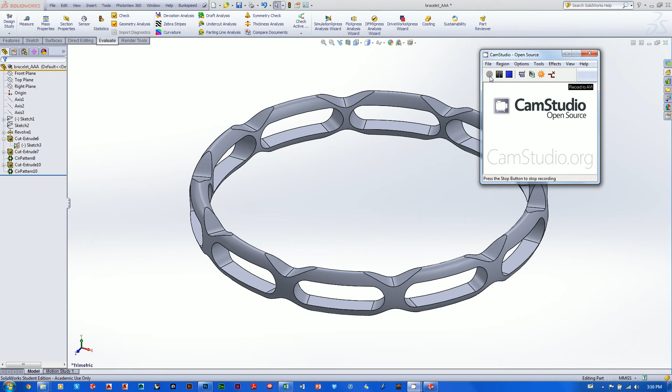All right, here we go guys. Now we are in the final home stretch here with this bracelet project. Everything is looking really good. We are super happy with all of the troubles and trials and tribulations we've made it through.

But the one last thing to work out is the ergonomics on this bracelet. It's looking pretty close to the sketch that I made, but I'm noticing I've got this super hard edge right here. If I wore this on my wrist or tried to slide it over my hand, since I used my calipers to measure this out, I know I'm going to have to really press it on there. I don't want to cut myself, and I don't know what kind of materials I'm going to make it out of.

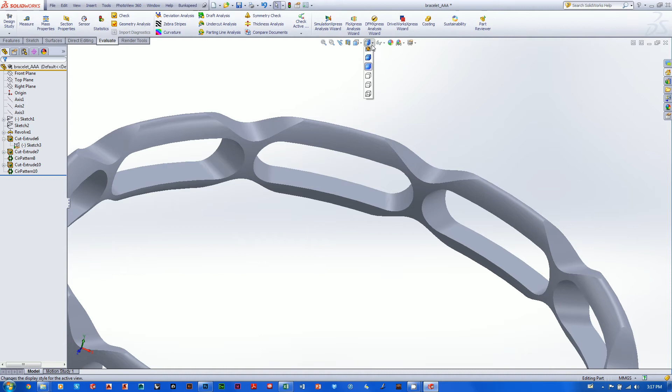So I want this thing to be really soft and have some nice soft radiuses and rounds on all of these edges. Let's just get right in there and add some fillets, and we'll see how that process goes, because using the circular pattern tool and patterning in general in SolidWorks causes so much mathematics to run that your computer can really slow up. Hopefully we'll be able to get some fillets on here without too much of a problem.

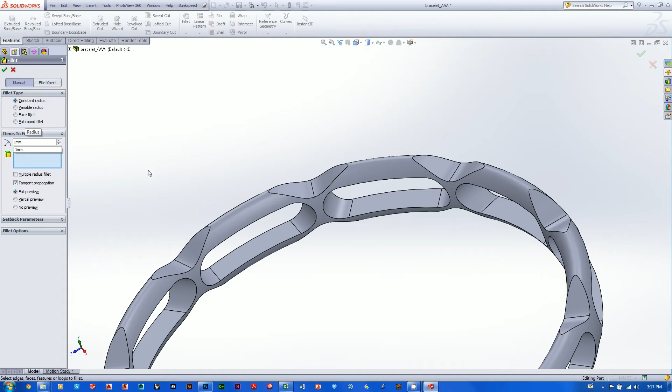Let's just see, we'll start with 1mm. Let's see if we can add some 1mm fillets to this. There we go, so it works. Take a look at that. It's working, definitely.

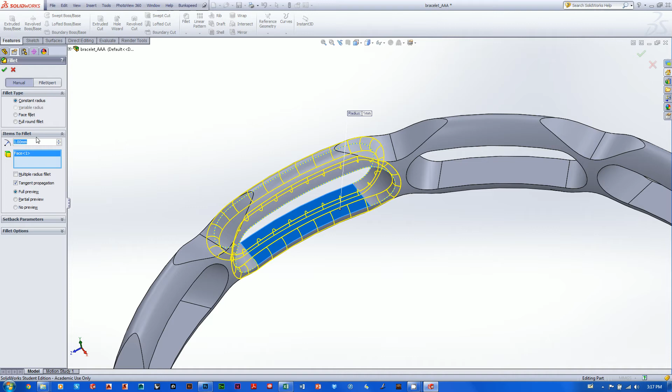That 1mm fillet is working, but if you see right here, that fillet just smashes right into the edge of our cut feature, and I don't really want that to happen. So let me just shrink that down to 0.5 and see. There we go, now if we go with 0.5 we get a little bit of space, and we should be fine.

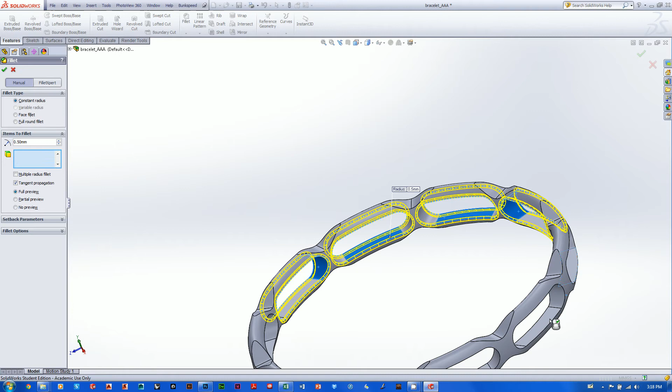All right, so it's going to be 0.5 all the way around. Just stick with me here as I click through this. Here we go, adding fillets to every little edge. We're just going to say green checkbox to confirm that. All right, zoom back to 3D, and we'll zoom right in on our thing here.

Yeah, my computer is just really slowing up with all this fun stuff we're adding at the last minute. I'm going to open up a new fillet, and we'll try to add a 0.5mm fillet to that.

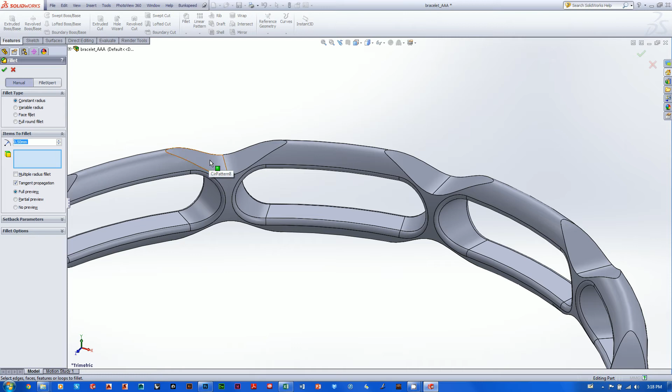Yikes, what is going on with this? Let's take a look. So we have a couple of little blemishes here. They're kind of entertaining, let's just take a look. I'm going to green checkbox just for fun. Just because I can, you know?

SolidWorks is great about that. If you mess up, it's not going to crash the whole program and you're going to lose all your work. It's going to go ahead and just add your screw up to your model and say, yeah, well, that's what you wanted, so that's what you get.

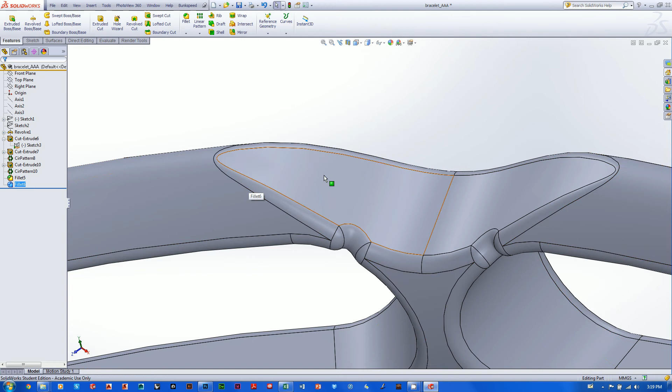Anyway, it looks like the fillet we just added to the top here has collided into the fillet we added to this here, and it chopped into the form enough that it just rounded that whole little edge off together and dove into the part. So that is definitely not what we want to do.

So I'm just going to edit this feature here, and we'll try to pick a fillet that is a little bit smaller so they don't knock into each other. Let me just try 0.25, which is 1/4 mm now. Look at that, it worked.

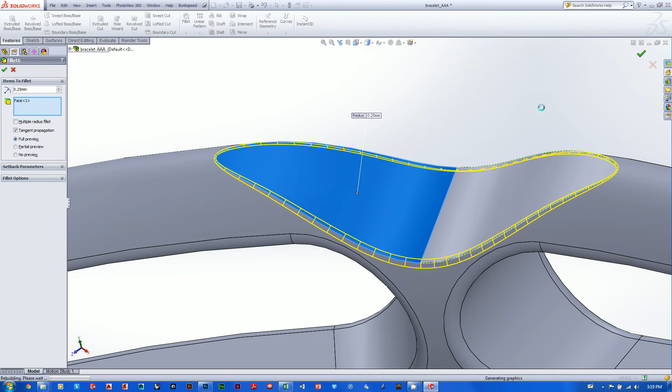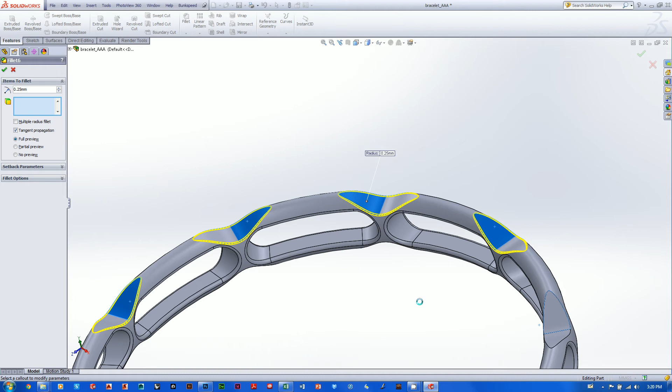1/4 mm, folks. If you're out there and you've purchased your digital caliper yet for the class, I want you to look at your caliper right now and open it up to 1/4 mm. Okay, and take a look at the size of this detail that we are now adding to this part. I mean, it is seriously microscopic. This is a hilarious thing to be adding to our part. But later on, we're going to see that it is the smallest details that the designer adds that makes the part the most beautiful.

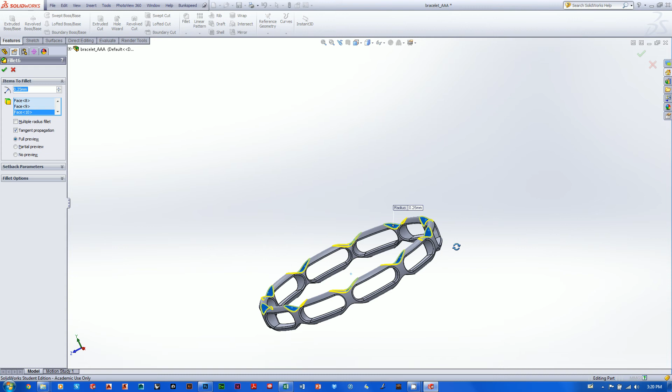So we'll just go ahead and add the 1/4 mm. There we go, voila. And we're even going to do it on the other side too. Look at this, okay. You're just going to have to stick with me.

And I want you to notice now, for each one of these fillets that I add, the amount of math necessary to hold this part together is getting bigger and bigger. I mean, it is getting gigantic. You can see that the time in between when I make this click and when the fillet fires off, it's getting longer and longer with each one of these that I add.

Now this is entertaining to me, I don't know why. I guess I'm a nerd, but it just kind of makes me laugh thinking about my ability to mess with the computer in this way. I get to kind of torture it because it sometimes tortures back.

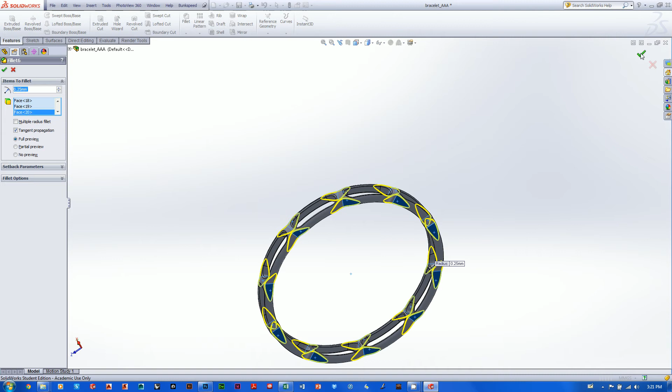So there we go, that was the last one. Green checkbox with our 1/4 millimeter fillet, and we are all set. Look at that—our bracelet is done.

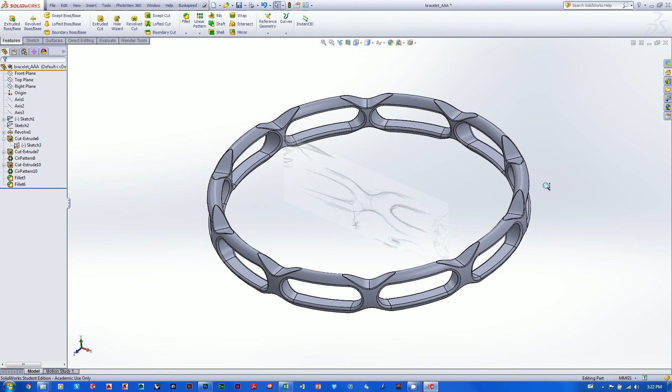Let's go ahead and look at our original sketch real quick. I'm just going to show that. And I'm saying that looks pretty dead on. I'm happy with it—it looks even better than the original sketch, and that is the point, right? We collaborate with the computer to take our designs to the next level, to increase them in quality. And so that is fantastic to see. I'm super happy with that.

I'm going to hide that sketch again, and I want to show you one more thing before I shut this down. I'm going to zoom way in on this guy. Now, in the past, I've been going to my display style button here, constantly switching between shaded with edges and shaded alone to check that I have all these soft edges and so on. But there's one more I wanted to show you—this one here with the little gold ball: integrated preview.

Inside of SolidWorks there's a program called PhotoView 360, and this is SolidWorks' rendering program. Most folks are used to hearing about KeyShot and Bunkspeed, which are both super high-end rendering programs that will give you the crispiest renderings you've ever seen in your entire life. But SolidWorks is amazing in that it comes with its own rendering program that works inside the program while you're working. So let me just go ahead and turn that on, and we can take a look at our part.

In all of its glory, fully rendered out. Click—and everything goes black for a second. Now this is going to just bombard our hard drive with a crazy amount of mathematics, but take a look at what we get. There you go: our finished bracelet in all of its glory, rendered out in full beauty.

There she is, I'm super happy with that. This is a fully solid part at this point. We are ready to go, we are ready to 3D print this baby. It is totally finished. And I'm happy to announce that, from the looks of right here and here and a little bit here, that 1/4 millimeter radius we added does in fact give us a few more extra little fun highlights that make our part really sing.

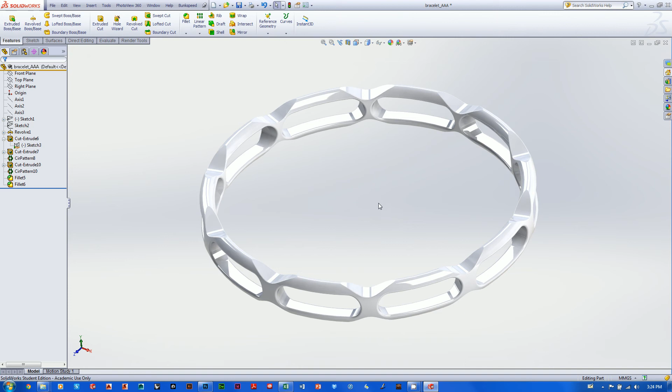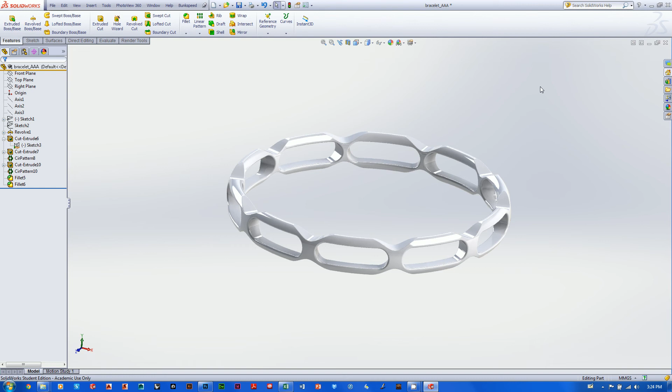And you can middle mouse button to scroll around in this rendered view, and that's going to throw you into this totally pixelated state, but it'll snap back to its rendered state pretty quick. So this is great—if you're out there working freelance or at a firm, and your boss walks up wanting to see a review of your model as it is or in its finished state, you can just quickly go up here to the integrated preview and throw on a renderer and take a look at your part in all of its glory. That again is one of the things that makes SolidWorks so great—you have this extra functionality of being able to render out your parts in a quickness.

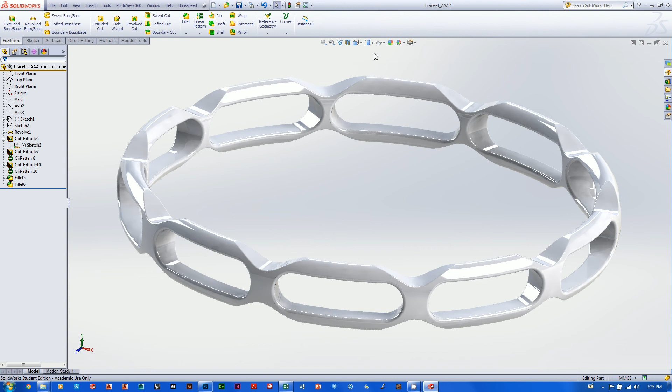So to confirm that our 1/4 millimeter addition really did do us a benefit—so there we go. All right, I'm going to turn this off now because my computer is really getting angry at me. So there we go.

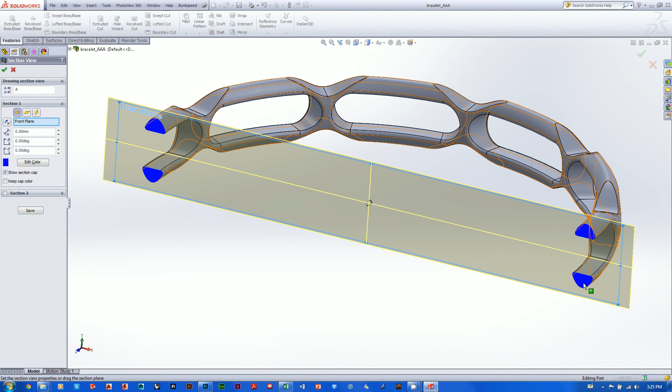A couple more things to do. I'm just going to go ahead and save this part, and then I'm also going to do a save as. Oh, first I'll just confirm real quick by using my section tool here that yes, in fact, this thing is solid and ready to print.

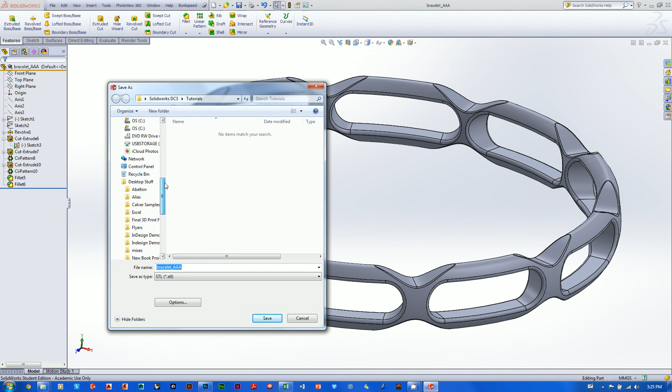Turn that off, and I will go save as. I'll open up my save-as-type dropdown and scroll down to STL right here. I'll keep the name the same, and I'm going to save this directly to my desktop—wherever it is, there we go, desktop—and I'll hit save.

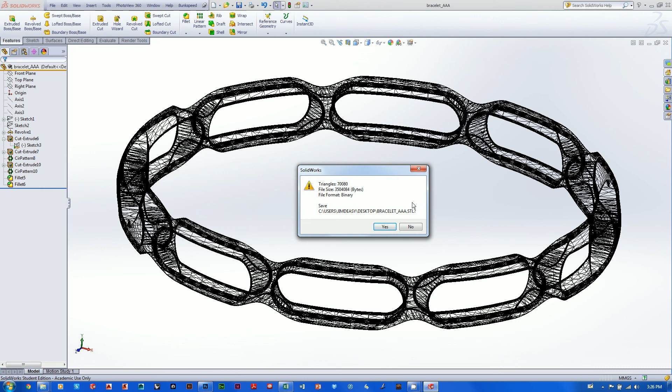It's going to give me this SolidWorks dialog box saying there are 70,080 triangles inside of this STL file, and that is going to be a lot of bytes. This is where it's going to save it, and we just want to say yes. And there we go—we are done.

Close this puppy down, we'll hide the SolidWorks program, and we will take a look right here. Where is it? Aha, here it is with a nice big metal icon on it—bracelet AAA STL file, ready to 3D print. And there you go, guys.